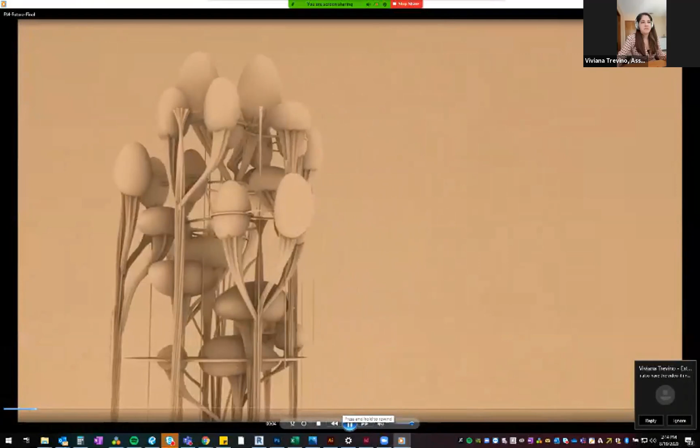The prompt yielded an opportunity to not only dream up some fun architectural solutions, but also to imagine a whole new world. The world we imagined is a bit bleak. The sky is dusty and the ground is uninhabitable, likely due to destructive human patterns and the inevitable impacts of climate change. As a result, humans have created a new ecosystem, 1,000+ feet in the air, coexisting between the duality of control and organic life.

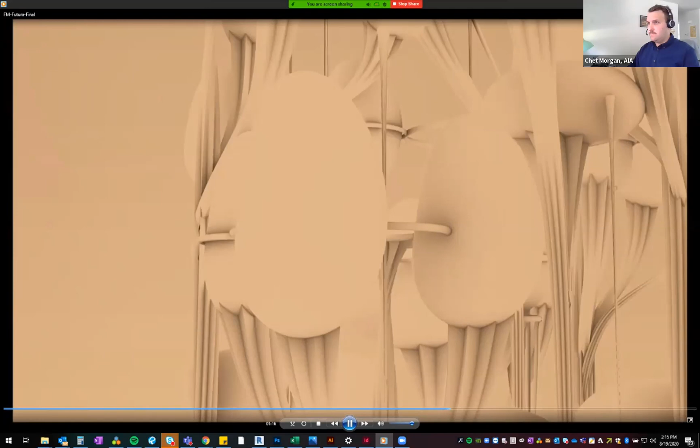The transit system plays a major role in how we chose to address our design response to education. Imagine this system as a pre-programmed, interconnected circulation track that facilitates the daily schedule of students, staff, and faculty, keeping everyone moving on time and spaced apart at an appropriate distance. We designed a modular, tiered seating system that would allow for social distancing. It takes advantage of vertical height and yields larger classroom settings. The most coveted experience with nature is at the uppermost level, which is composed of the conservatories.

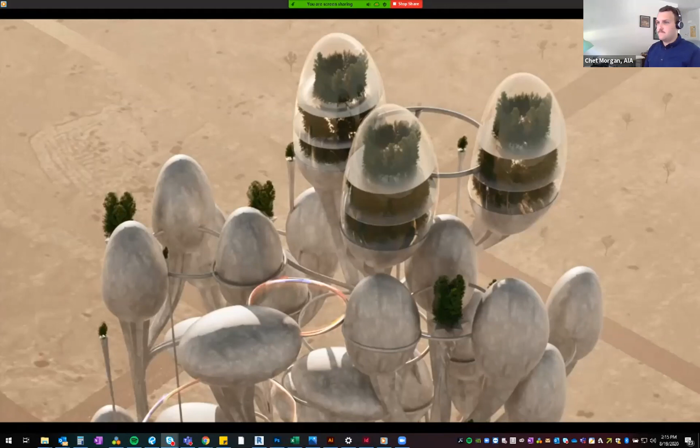We've been able to ask questions like, what direction is our society and our city headed in? And how will our current actions shape our future?

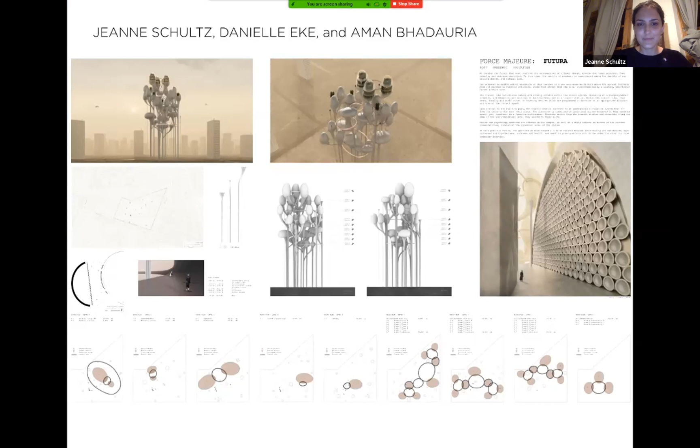Okay, great. Thank you. First of all, thank you so much, Connie and Al, for your comments on our project. I really appreciate that very much, and am very grateful for the time that you spent looking at our details.

Although we know that the project wasn't extremely contextualized within this neighborhood, we find public interest and community-focused design to be very important.

Particularly, we were looking at this issue of the pandemic, which has hit Europe very hard, and now the United States very hard. For me personally, living in Barcelona for the last 10 months, I didn't plan to be here so long, but it has been a whole new world, and I think we found that this issue of pandemic, we've seen things like this before in the past, and I don't think it's a one-time thing. We will see it in the future.

And also the circumstances of today got us thinking about how these things are directly related to our behaviors and the way we are using our resources and the way that we are connected to our amenities and connected to our cities even. For example, especially during lockdown, the city was so desolate and quiet, and seeing a city without people was just an incredible thing. I know personally I was extremely inspired by this, almost like a dream state.

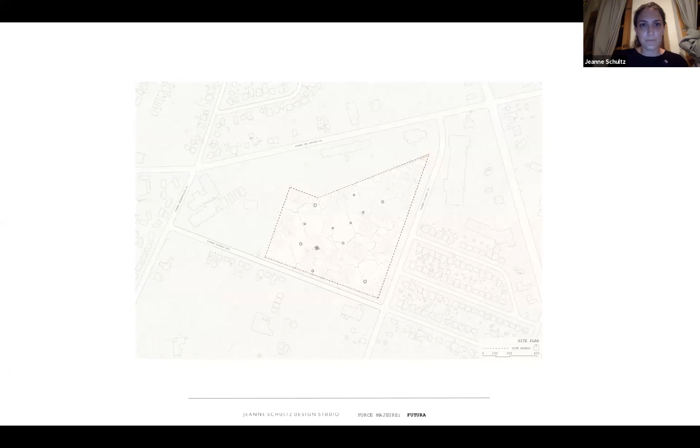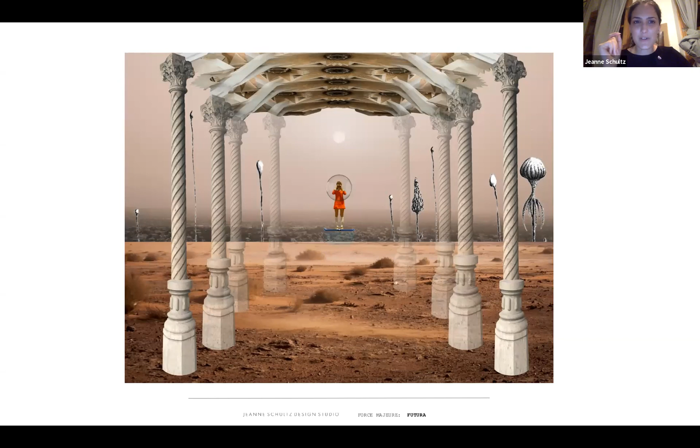I'd say this is more inspiration, more of that dream state inspiration, sort of surrealist, almost apocalyptic, but this sort of dream state thinking.

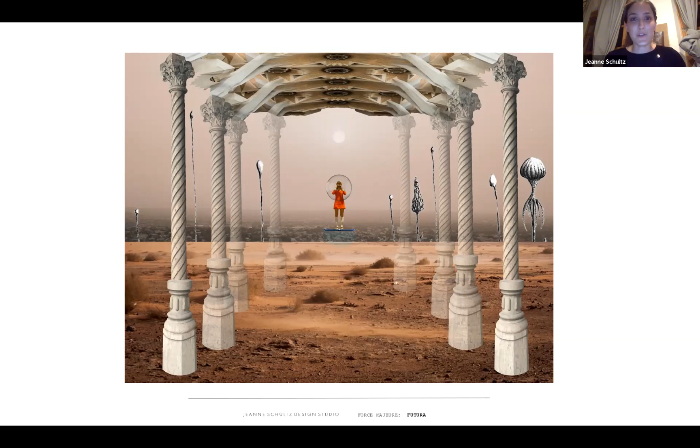Having lived in Europe for a while, I was also very inspired by Catalan architecture, so maybe in the form of the columns, these twisting stems, you can see formal elements from La Sagrada Familia, but a lot more twisted and warped and absurdly high. Gaudi must be turning in his grave.

We imagined the soil as this dusty, Mad Max-like, uninhabitable place down at the ground level, or natural grade, and the building as an organic cluster, an organic new ecosystem, rises above that.

Our first level begins at almost 1,000 feet in the air. Why 1,000 feet? Honestly, we were looking to the future, and we decided let's put it high.

We were looking at the vantage point of the highest building in Austin now, doing some charrettes with that, imagining the perspective of this thing high in the air, and what it would be like floating in these perhaps moving or flying vehicles. So we put the first level at this height.

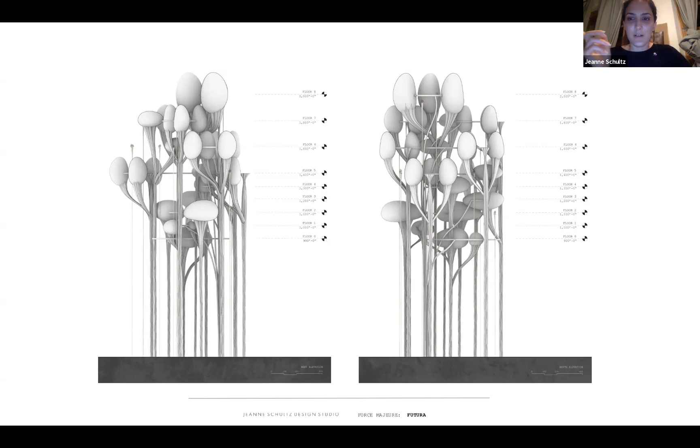The formal elements, as I mentioned earlier, are only a few simple elements really, with these stems taking on quite organic features, almost like mushrooms or all kinds of things that they reminded us of.

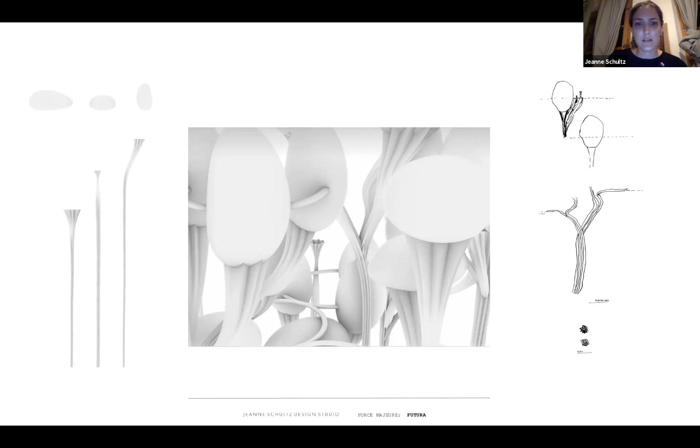The building pods had just a few types that, depending on the program of the space, would switch whether more vertical or more horizontal. The pods sit perched on these vertical stems, and because we have so many levels, the stems are weaving through and connected by our transit system, which we talk about later.

The spatial programming was quite interesting for us. We felt like although we were looking to the future, we wanted to stay within the site bounds, so we really used every little nook and cranny of the site. If we had infinite space, it would have been a totally different building system.

The hierarchy of each level was such that we wanted our services or more public spaces to be separated, with each of the classrooms or each grade level having their own level, and each level having its own cafeteria. The more public places where students would gather, likely once a week or every day, like the gymnasium and auditorium, would be large and occupy just one building level by itself.

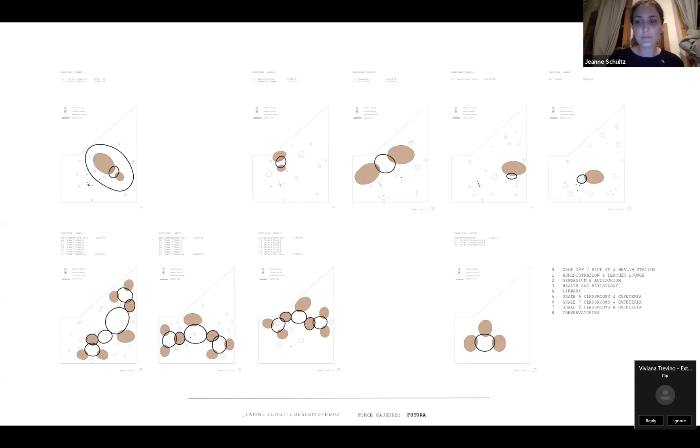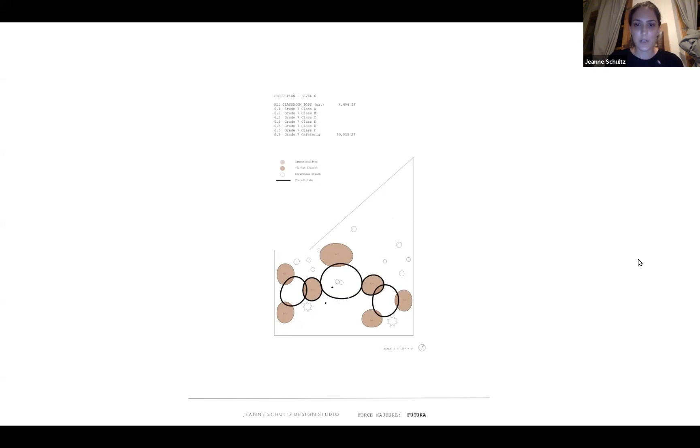This is an example of one building level that has the classrooms on it. We have 6 pods, each with one cafeteria per grade level. They're connected — you can see these stems, the light colored lines puncturing through, continuing through the system, while the darker rings are the transit system, which is how we traverse through.

The transit system was a big part of the design, something we thought of early on. We imagined it to be more translucent, so you could see out as you're traversing, sort of dancing around the system and skating around.

We see it as a very highly technological, pre-programmed thing, where each system would be pre-programmed and on a time system, so that students would keep moving at a particular distance and maintain social distancing, according to the daily or weekly schedule, almost like cars on the ground, but instead in the air and in these tubes.

We even thought about how that would be possible within the tubes, imagining maybe they're hovering on hoverboards with an electromagnetic strip, going into that detail of thinking about how they would traverse through. And once they entered and exited that transit station, what does that mean once they enter and exit the buildings? That actually yielded an interesting opportunity for us to have controlled entrances and exits and circulation that could be pretty safe.

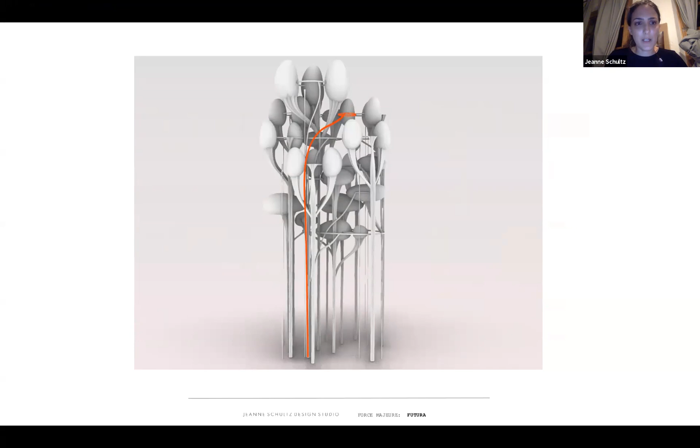This is an example of how we imagine the transit system, although translucent. This is a section, and the classrooms. Each of these classrooms has 362 pod niches, and our building system had a total of 6,516 students, which is quite a bit.

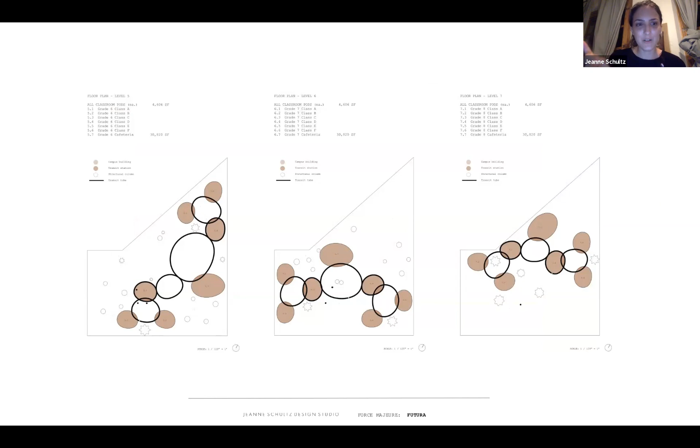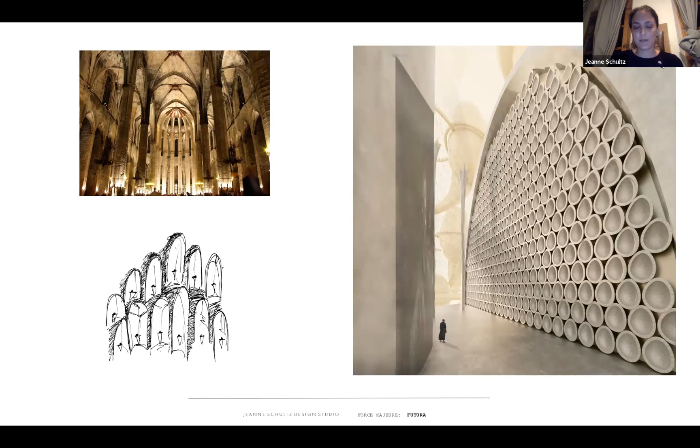Each of these niches we imagined would have one student, with the professor standing maybe at the center down here. We assumed each of these pods would have a view of the teacher down at the center, and then a nice glass top to let in plenty of light and views of the outside.

I think taking advantage of this vertical height, and what that allows for, was a strategy we imagined could be implemented in the other larger buildings, for instance the gymnasium or auditorium, this sort of almost cathedral-like tiered seating system where you could have a lot of people together, stacked.

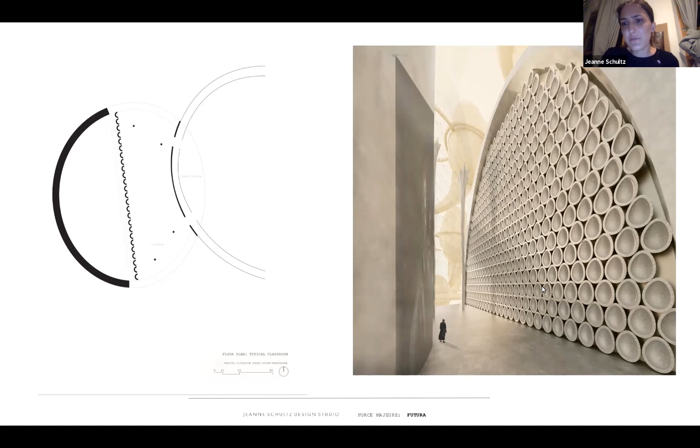The classroom was a really big, important design element for us, because we also felt like it's social, it takes care of social distancing and allows everyone to still be together. And then the conservatory was a really special design element.

We imagined this really beautiful enclosed experience with nature that anyone, or the children, could go to every day. When we got to make our mock-up schedule, I thought having time at the conservatory for one hour every day to have a respite with nature would definitely be needed, especially when we don't know how much greenery is going to be available at this time.

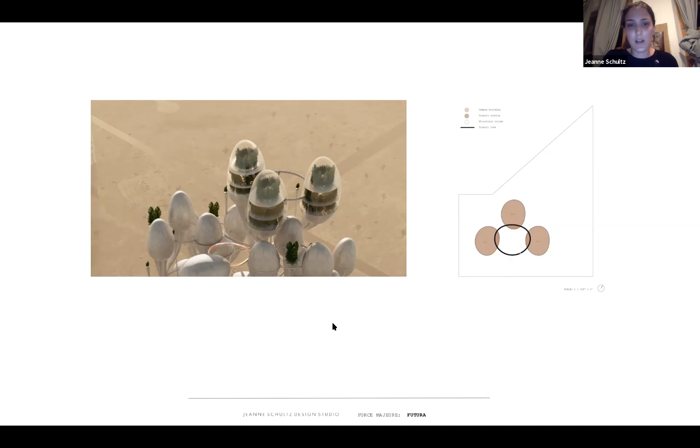And then in addition to the conservatory, we have the individual stems. And that's all, thank you so much.

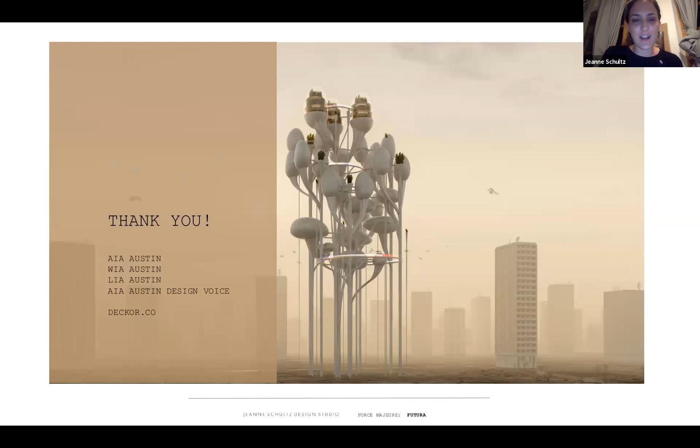Thanks, Team Futura. I do want to be respectful of everybody's time, but I do want to have some questions from Al or Connie if you guys have anything, or any of the other panelists.

I just think it was a very nice verbal presentation, and for those listening, we might be interested to know that we did not see the videos, so it's nice to see the videos as well. But from the presentation you just gave, it is clear to me that this design, which frankly was, for our purposes, mostly simply beautiful, was also very, very carefully thought through. I don't mean to demean the thinking that was part of your presentation, but the depth of the thinking process you just explained is very nice to hear. Thank you very much.

I just wanted to echo what Al was saying, that I feel like just from watching this video and hearing your presentation, we got a whole new layer of information that we did not have before, and it really added to the project. Again, great project, really, really appreciate the effort. Thank you very much.

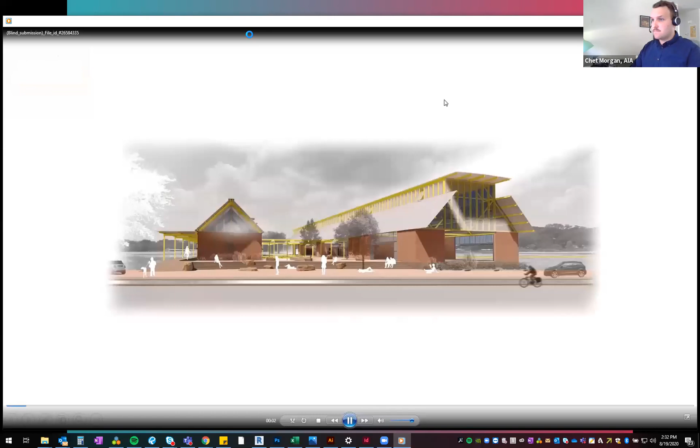John S. Chase Middle School protects the well-being of a community physically, socially, and environmentally. The design approach for the small middle school in historically Black East Austin is centered on several distinct goals.

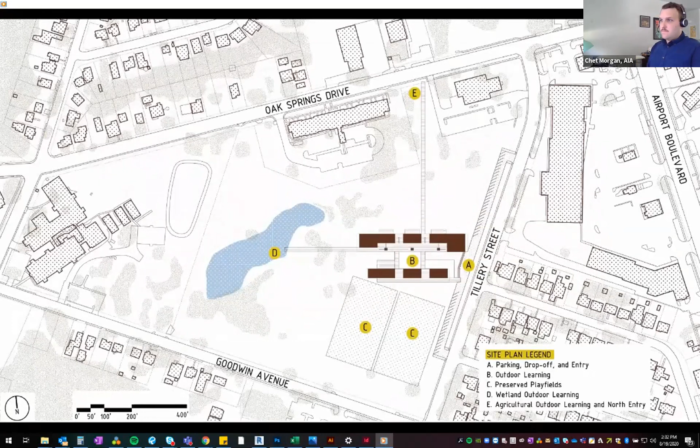Our first and most important goal is to create a highly transparent public space which promotes inclusivity, encourages openness, and integrates nature. Second, the educational facility operates optimally during a viral pandemic and adapts seamlessly to contemporary educational environments. Third, the simple modular structure maximizes flexibility and allows expansion.

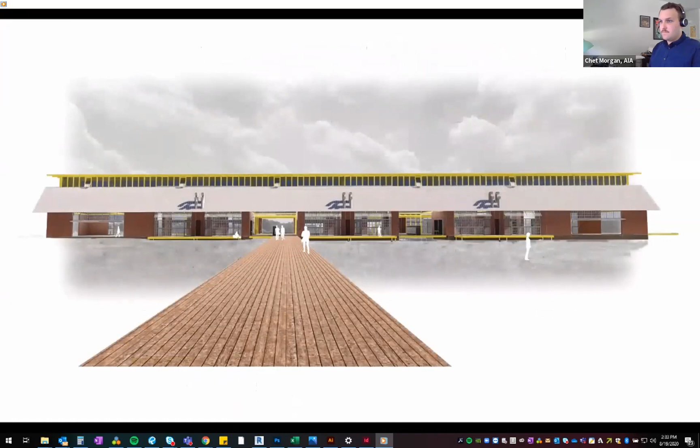Preservation of access and views to the natural site promotes public health and equity in the densifying neighborhood. Elevated wooden walkways connect the school to the street and develop urban links to the landscape. The boardwalks encourage student engagement and provide the necessary space for social distancing.

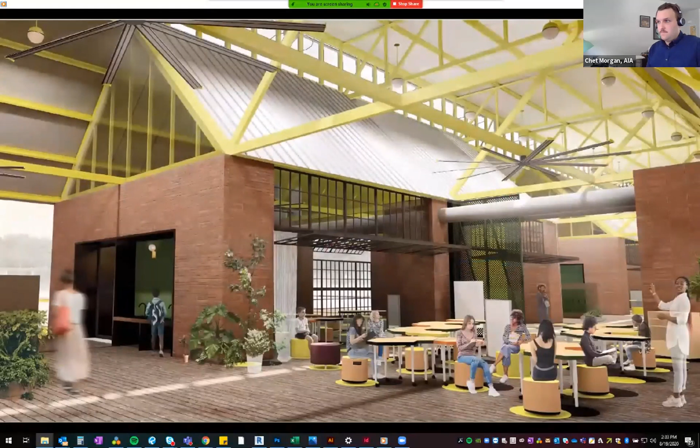The central strategy of the building's design is to reduce risk of viral spread through natural ventilation. Classroom square footage is duplicated to outdoor capacity, creating hybrid learning environments. Shade, HVLS fans, operable apertures, and ideal site orientation make outdoor learning possible.

When students are confined to indoor learning, distributed HVAC systems place the interior spaces under positive pressure and bring fresh air in. Six classrooms accommodate 20 students each, using traditional school scheduling. Modular movable desks facilitate students indoors or out. Students stay at personal stations while instructors rotate teaching spaces.

John S. Chase Middle School is named after a prominent Black modernist architect. Chase was the first Black student to attend the University of Texas School of Architecture. Many cherished public buildings were designed by Chase and define the Black East Austin community today.

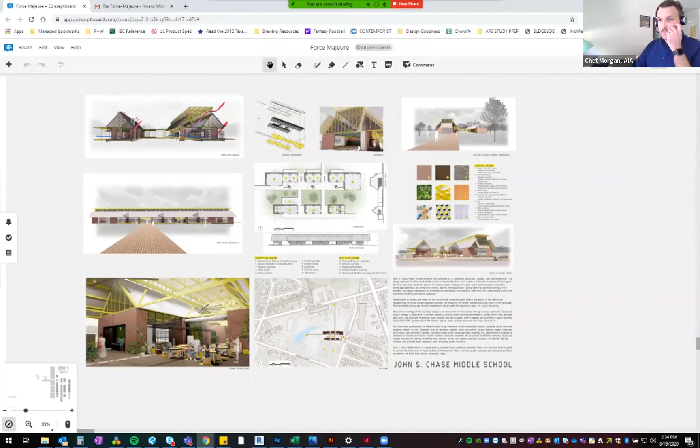I'm going to start off by talking about some of our central strategies. Essentially, we wanted to take traditional education structuring and operate around that. We looked at what's currently known about viral spread and applied that to our design. What we know is that outdoor ventilation really minimizes risk, and we wanted to make sure we were designing a building that facilitated current needs but also accommodated for the future, for expansion, and is a really enjoyable, practical building going forward.

Additionally, we looked at how hybrid indoor-outdoor environments reduce density in education structures. We really focused on materials in a way where we could leverage natural virucidal and antimicrobial technology with brick and copper alloys and silver woven fabrics. With that, Jim's going to take over and talk about program.

I'll share a little bit about site and program arrangement. We placed the program at the center of the site with the public entry on Tillery. In doing so, we're able to preserve playfields to the south and additional open space to the north. We use these boardwalks to connect to the north to Oak Springs and public transit, and to the west to engage the pond.

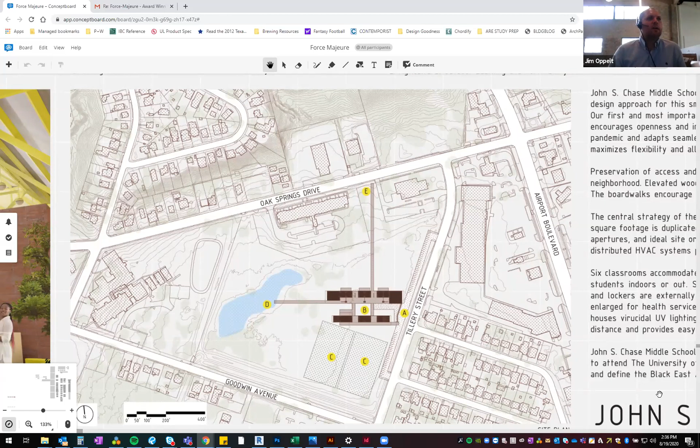In terms of the program layout, we used a 32 by 32 foot grid. It was really about exploring how we could space the elements apart, both horizontally on the ground plane, but also vertically to allow space and ventilation. We were using a clear span structure for flexibility, in case densification or additional building elements conditioned below the roof could be added later.

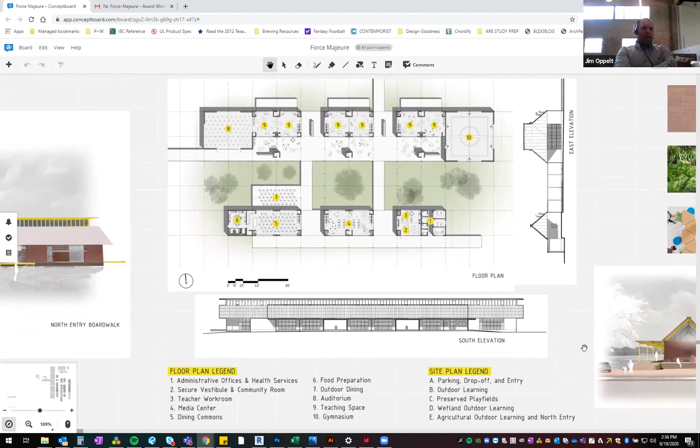We used this really high roof element in the teaching space area. I think we were thinking of our background growing up, being in barns or warehouses that have these vast high spaces to get breeze flow through and optimize comfort for outdoor learning.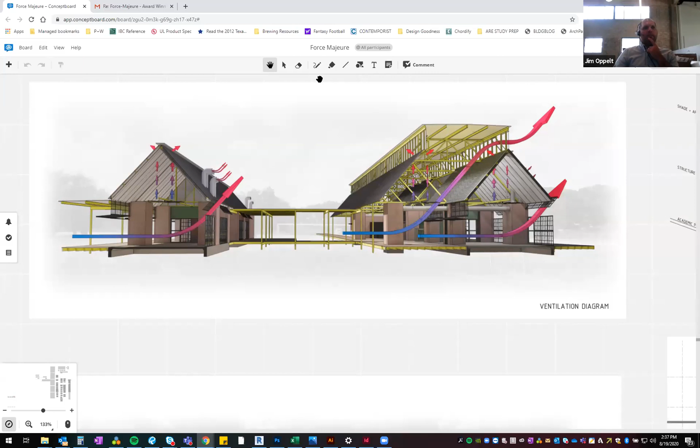Great. Al or Connie, did you guys want to jump in and add any other additional comments for the John S. Chase? I went first before. Why don't I give the floor to Connie first?

Okay, thank you, Al. What I really liked was the modular aspect of it, and this is true of many of the ones we're talking about today, there was a real connection to the site, to the neighborhood and to the community at large. It seemed friendly to the site, friendly to the surrounding architecture, didn't dominate or jar against what was already there. I could easily see this being built. Just really thoughtful, and it felt like it would be a good, friendly school space, because you're dealing with kids, and so it would be very different if it were an office space or something else.

This feels like a school, and it feels like a school in East Austin, and I really enjoyed that. I also liked the integration of outdoor use. To me, the most successful part of the design is the flexibility of opening up a classroom and having that ventilation come in and out. I thought that was really thoughtful, how we could have class while being safe.

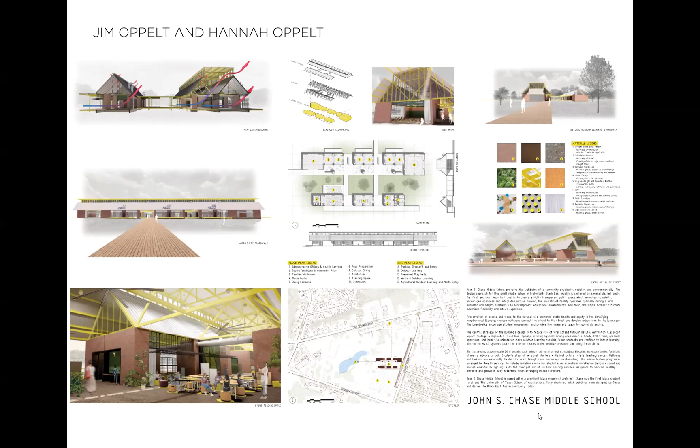Thank you. Thank you very much. Next, we have Tillery Park.

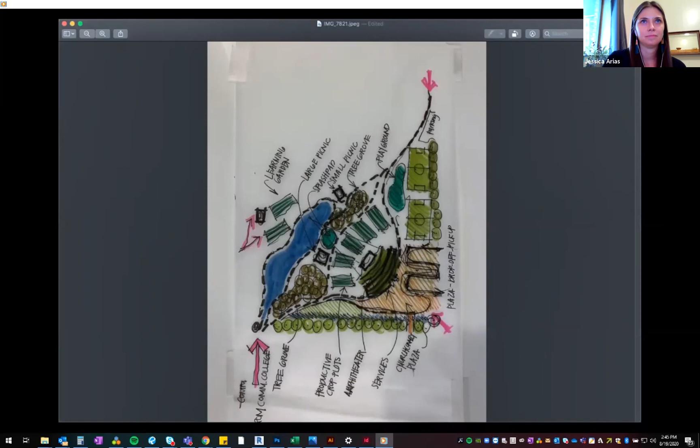Congrats again, guys. Let me pull up the...

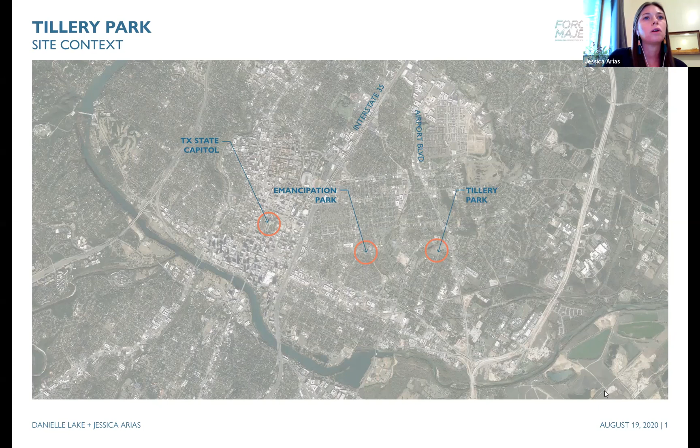So in thinking about the inspiration for what we would design for Tillery Park, we knew that we weren't going to create the same type of experience. But at the same time, we were recognizing the need for a public and civic gathering space that would specifically be geared towards the needs and enjoyment of disenfranchised communities.

Looking at this site diagram, it's a civic space for communities that have been isolated, but it's also part of a much larger system that's an integrator. We think about I-35 as being this physical barrier, and the very imminent redevelopment of Airport Boulevard as having the potential to create similar effects, with the location of Tillery Park in the neighborhood being squeezed in the middle.

We imagine that Tillery Park would be part of a larger trail and park system that transcends all of those corridor boundaries that are really dividing neighborhoods, and kind of stitch parts of the city back together. So, on the next slide.

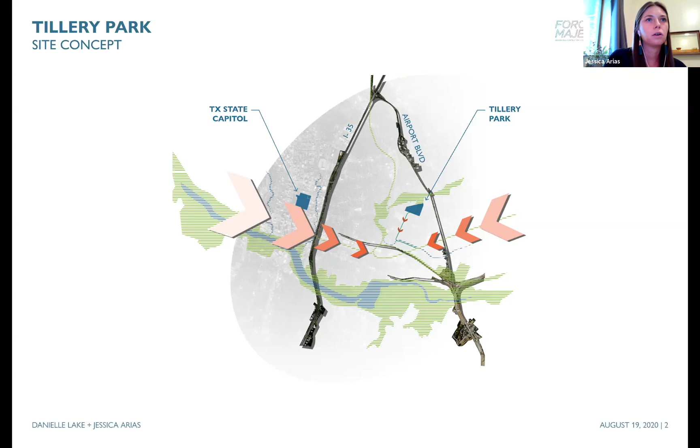Yeah, so I think Jess made it very clear that, as planners and urban designers, we really zoom out and look at the larger forces that surround and impact the site. We look first at how people would approach the site and identified these major access points, which included folks arriving from transit, people arriving by car, and where any trail connections would be that could connect to the nearby community college and the adjacent elementary school.

These major access points start to set up the circulation and overall site organization, as well as the large water feature in the middle of the site. Because of these parameters, we knew early on that the central building would house services and indoor programming, and it would be central to the site.

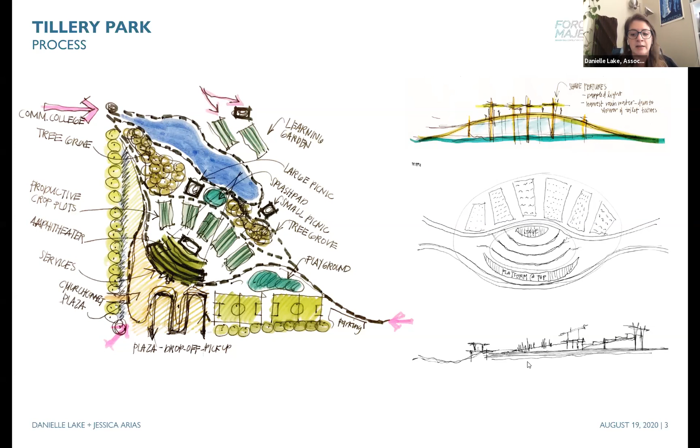We imagined that a sloping roof could become a surface for the amphitheater and set up views across the water, providing a point of prospect for the entire site. And because we have so much land to work with on the site, we had an opportunity to take advantage of its fertility.

We allocated a large amount of space for community gardens that have capacity to output large volumes of produce for the surrounding community. We viewed this as an asset, not only during times of stability, but also when an unexpected disaster or pandemic impacts supply chains to grocery stores—a productive community garden of this scale would be invaluable to this community.

We also saw this as an opportunity to provide sources of income for people experiencing housing instability who come to Tillery Park for other services. We thought this could be a place to earn a meal or living wage and work in these gardens while coexisting with other members of the community. In a small step, we hoped this site would continue to break down the stigma of homelessness and break down barriers within the East Austin community.

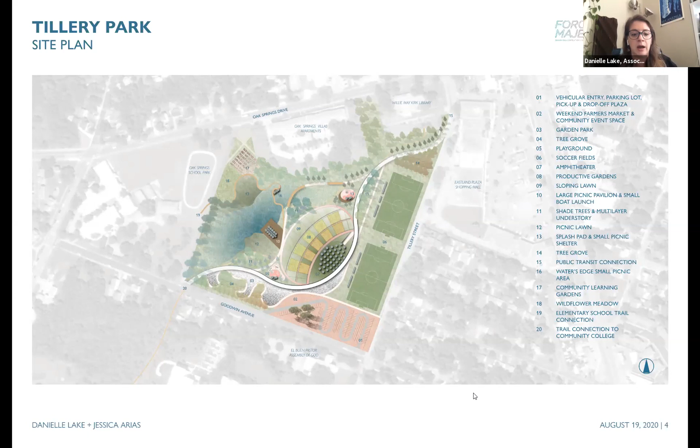Just a quick note, moving on to this slide. We knew early on that we wanted to create some topographic interest on what is generally a flat site, but also take advantage of some of the shade structures, which you'll see on the next slide in just a minute—hold here for a second.

For the services building, we really wanted to think carefully about how folks would be entering the building from the variety of access points, and think about circulation, privacy, social distancing, and sustainability all in one.

We felt that designing the building as concrete and surrounded by a mound of earth, we could envision lower heating and cooling costs through the seasons, as well as a defensible space that would be a place for refuge for the community in times of natural disaster, things like a tornado.

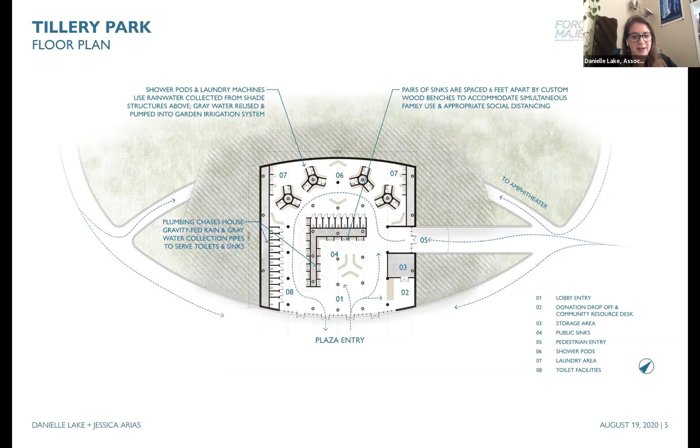We were envisioning that all the plumbing facilities would return and filter any gray water into the irrigation system for the productive agricultural plots above, and then take advantage of the rainwater collected from the shade structures—if you go to the next slide—that act as a place for respite from the hot Texas heat. While you're enjoying this elevated space in the amphitheater, those shade structures are simultaneously collecting rainwater and filtering it into the plumbing facilities below.

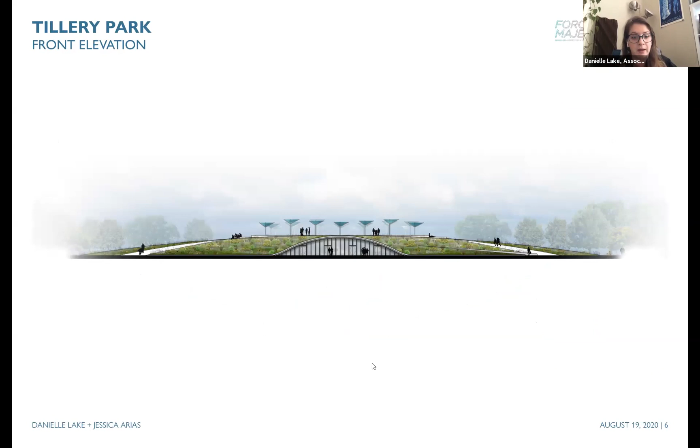If you go to the next slide—and just the last one, so thanks. Danielle talked about the mound in the building being the first instance where water is collected and immediately used, for shower facilities, laundry, as well as irrigation for the gardens.

It's also stored here as part of a larger collection system connected to other parts of the site, like the permeable areas in the plaza and different purification systems throughout the site. In a similar way, on the same slide, you can see where in the large picnic pavilion there's also a collection of water features—these basins will make potable water immediately available for visitors to the park, but it's also purified and stored there.

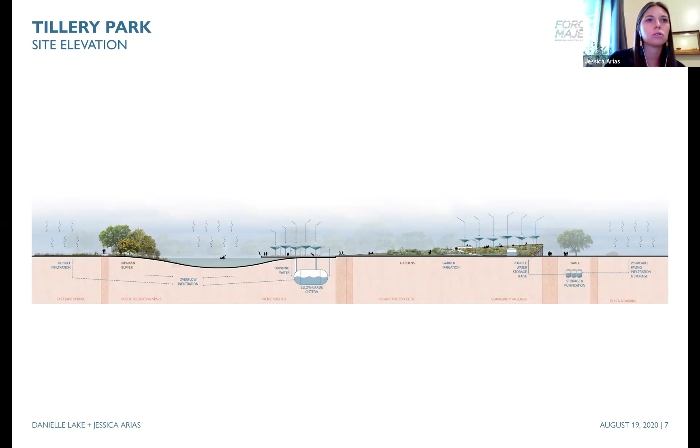When that system reaches capacity, it overflows into the retention pond, which has these expandable boundaries, but it's now protected by this newly restored riparian buffer, which includes large oak trees and other native Texas trees, and provides a unique trail experience for park users, connecting again to this larger system.

On the following slide, this drawing is really about a collection of ideas of how we imagined the experience of the park would be, that the circulation on this diagonal across the site plan would really be the organizing factor and a callback to the location of the site, which is underneath this ridge in the park system.

On the left side of the drawing, there are these grove areas of trees where the program is more flexible—it's civic space, a place where a farmer's market could take place. That's in contrast to the more programmed areas like the facilities Danielle talked about and the soccer fields, which are a focal point of the site, but it's also connected to this larger trail experience.

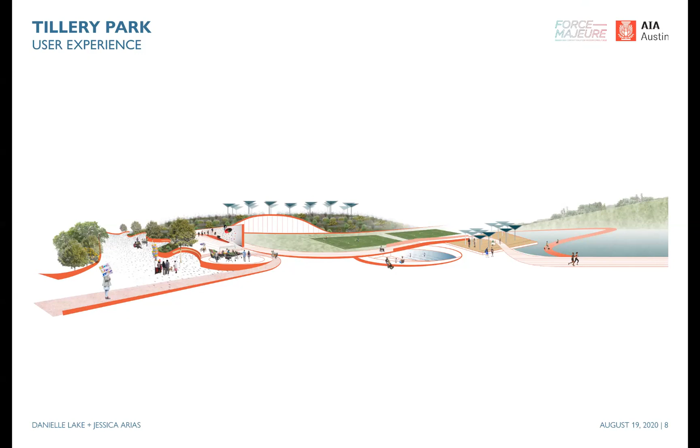I'm going to just say I echo what Connie said. We had a really nice time talking about this project and enjoying it. And I'm going to leave it right there so we can give some space to Nourish. Thank you both very much for this. Thank you, sounds good, Al.

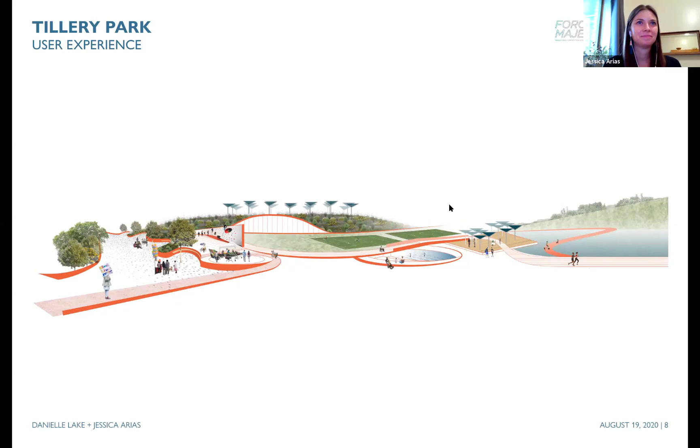Hi, good afternoon. I'm Juan Pablo Fuentes. I'm originally from Peru, but I did go to school in Houston, Texas. And right now I'm transitioning into the Netherlands, so I'm in that transition.

Hi, my name is Gabby. I'm originally from Peru, and then I met Pablo and Van in grad school here. Van, you're mute. Van, I think you're mute. Yes, I am mute. I'm Van, and like Gabby said, we met each other in grad school. My background's in architecture, and I also do real estate development in New York City. It was a real pleasure to work on this project with Gabby and Juan Pablo.

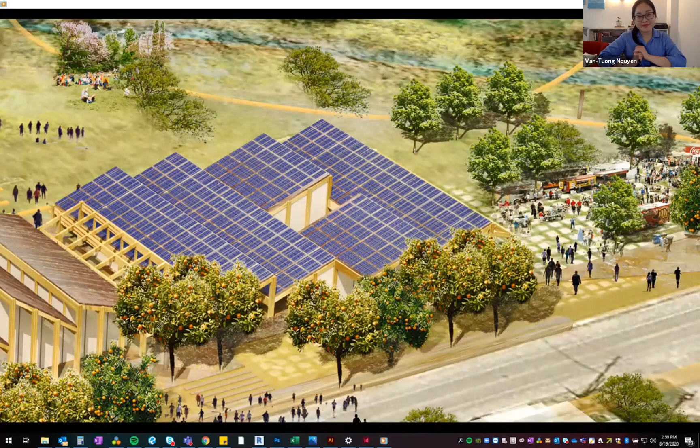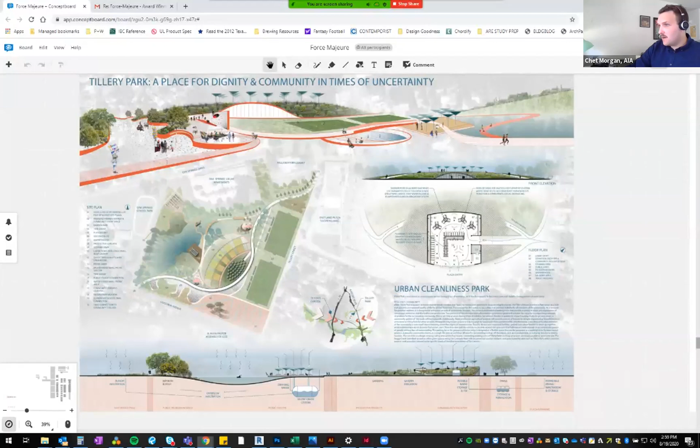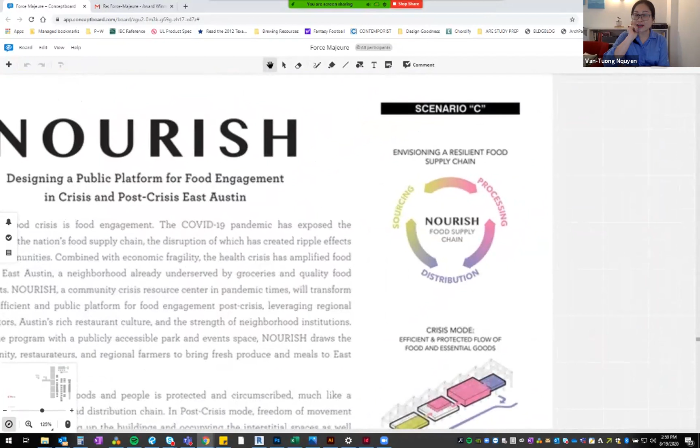Awesome, okay, let me pull up y'all's board really quick, and I'm going to pull it up on Conceptboard right here, so if we need to zoom in on anything just let me know. Sure, thank you. So you can zoom into the rightmost diagrams. I'll just quickly start there. But the video pretty much summarizes what we were intending for the project.

One of the things we noticed during this pandemic was really what we took for granted on those days was our ability to get food on a daily basis from grocery stores, etc. And what we saw was this disruption of the national food supply chain, and it exposed the vulnerabilities at a community level, especially for communities like East Austin, which is historically a food desert. And on top of that, it has tremendous economic fragility, which is impacting the families within the neighborhood on all levels.

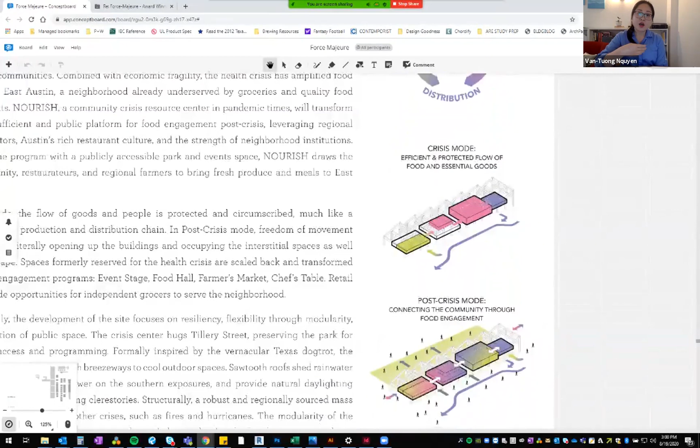So what we saw as our solution or proposal for this crisis center was something that transitioned from delivering food and essential goods during the pandemic times, but post-crisis, it's still food, but in a different way that can engage the community, and also leverage the really rich food culture that Austin has in general, from all levels, from the food truck level to high cuisine.

In addition to that amazing food culture, we have a very diverse and strong local community that we wanted to leverage, including the elementary school. There are some existing community gardens there, and the library and other services that are available, but just need a platform to engage not only the neighborhood at the neighborhood scale, but at a larger East Austin and city-wide scale.

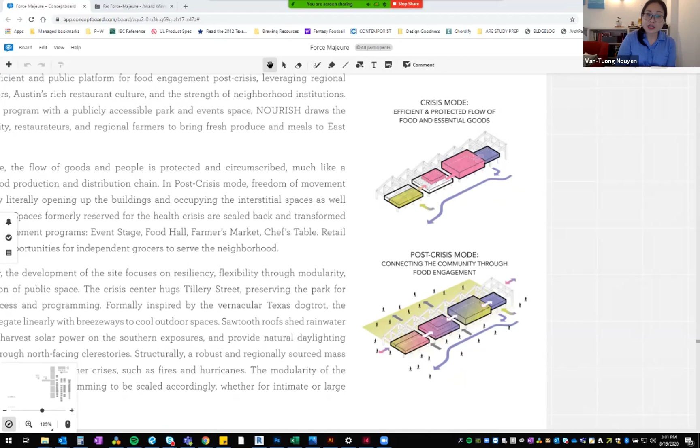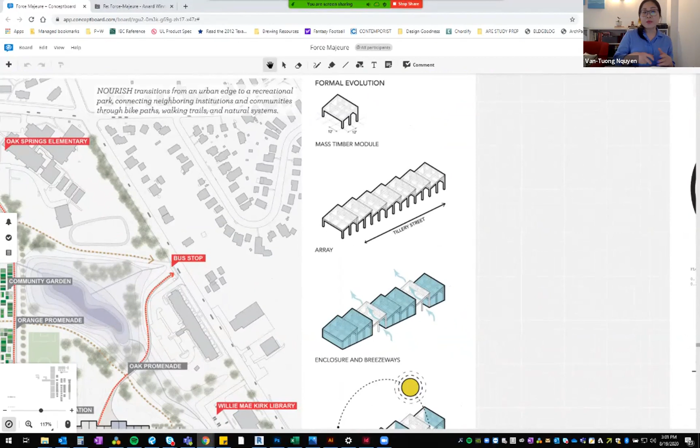So architecturally, we were looking at a project that would provide the flexibility to give us an opportunity to provide a very compact and streamlined approach during the crisis mode, but then is able to open up during post-crisis. And we looked at the site, from an urban design standpoint, as having this urban edge on Tillery Street, and then taking into account the existing really beautiful natural landscape there that could be an opportunity to transition into a park post-COVID.

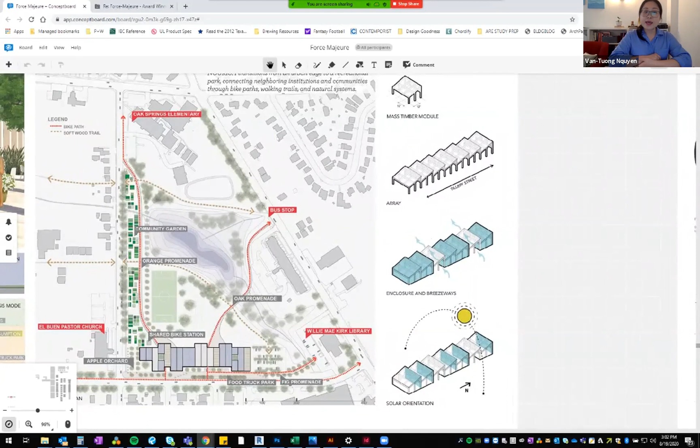Architecturally, we were also looking at other things to make the project itself more resilient and more sustainable, taking into account solar panels, the harvesting of rainwater, and we drew upon the Texas vernacular typology of the dog trot to create spaces that were both indoor-outdoor, that passively cool the buildings but also provide opportunities for gathering. As we've learned in this pandemic, outdoor spaces are a safer way to convene.

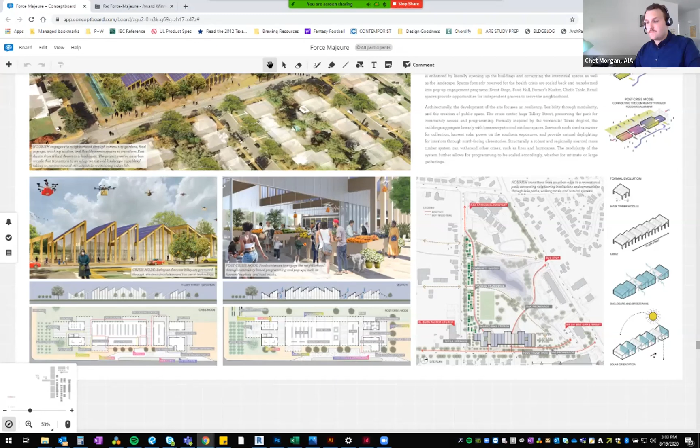It's probably something we have inherited socially moving forward from this pandemic. But anyway, we're still learning a lot about how humans react to this situation. So we left much of the programming up to the community. We just wanted this idea of creating a platform that would allow East Austin to become this food oasis. And that's it.

Well, I know it was part of the brief, but I really truly enjoyed the imagery you showed of how, during crisis mode, what it looks like, and then afterwards, how it's activated and how it changes, but it's still fully engaged. That was, I think, really powerful.

Al, Connie, do you have any comments? I'm going to let Al start this time, I took over the past couple of times. I'll just offer a couple of things on a site level.

I really liked the site organization. I liked the way this building was pushed up against one edge where there was contiguous residential fabric, and this seems like a really nice neighborhood counterpart to that fabric. I like the modularity of the thinking. I like the through passage, the kind of ventilation and the pedestrian passage. And I like the organization around the edges, activating the street edge adjacent to this neighborhood and keeping the more developed portions of the site at the edge to leave the center portion more pastoral and natural.

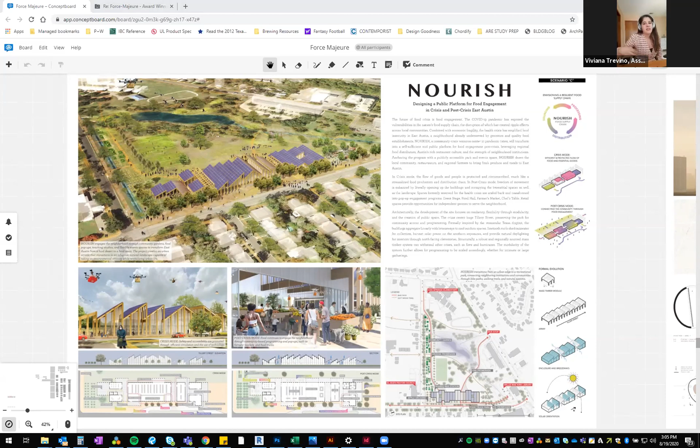Before we hop off, I want to open it up to any questions from the audience that they may have. Keep an eye on it. I haven't seen any questions come through yet. I guess just as a question to any of the panelists, how is the design process different designing virtually as opposed to being together in a group?

I've been in school, and I was in school whenever we went to lockdown, and so it was a pretty intimidating thing at first. Ultimately, I was really grateful for the opportunity to connect with my family on this project. And with the semester and this project, it turned out to be much simpler than it seemed at first, with all the technology available. So that was a pleasant surprise, and I think some of these strategies will probably carry on in the future as well.